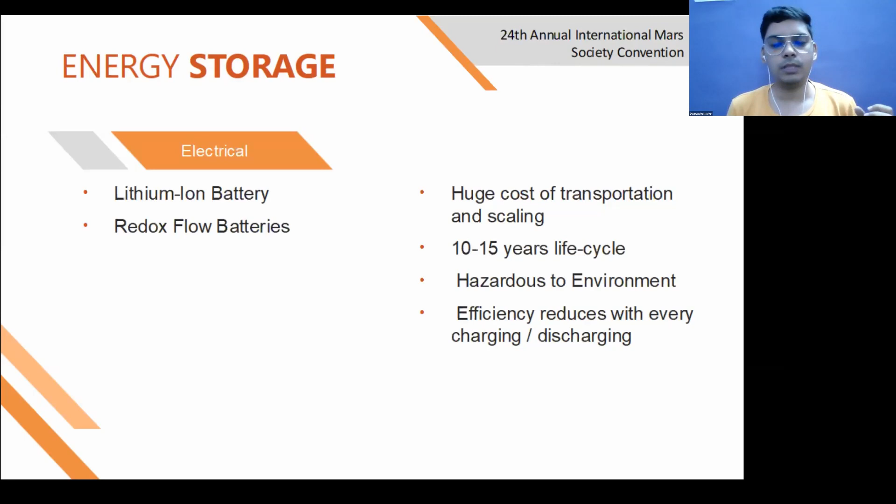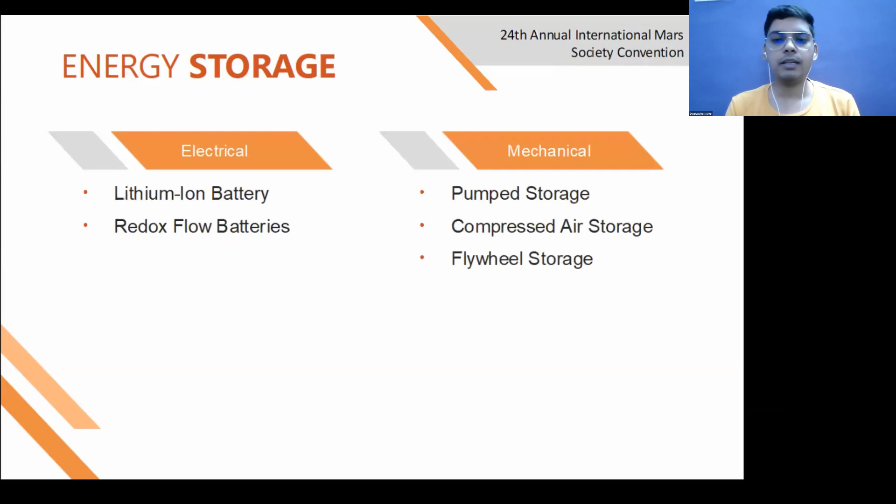So what could be the alternative? The alternative could be mechanical energy storage, which may include pumped storage hydro, compressed air storage, flywheel storage, and gravity storage. Coming to the first, pumped storage hydro has two reservoirs. This is commonly used on Earth, with an upper reservoir and a lower reservoir.

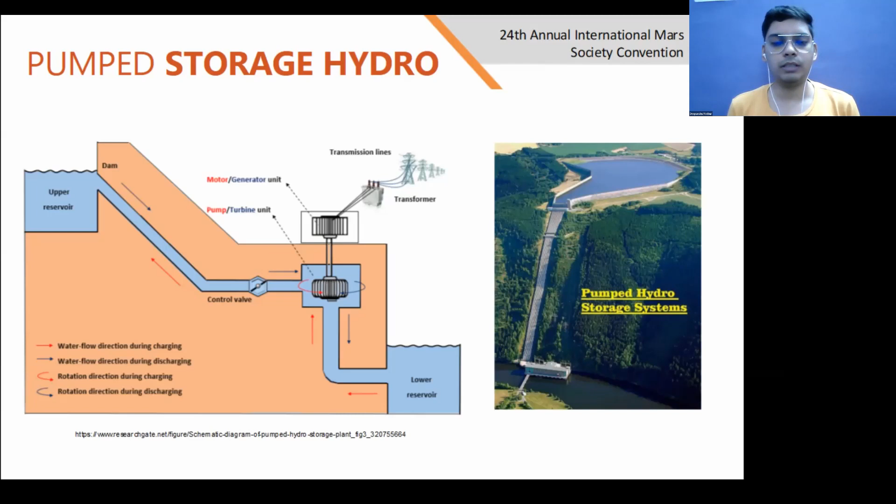When we need electricity, we release water from the upper reservoir, which has higher potential. This potential energy goes to the turbine, which generates electricity. When there is surplus energy, we pump the water from the lower reservoir to the higher reservoir. We cannot store electrical energy directly, but we can easily store water at higher potential. So we are using the gravitational potential energy of Earth to store water at higher elevation.

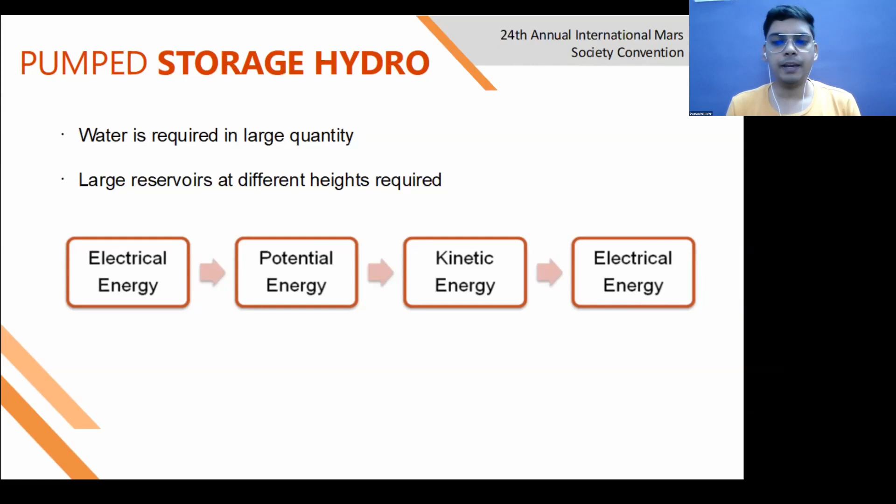Pumped hydro storage requires a large quantity of water and large reservoirs at different elevations. It converts electrical energy into potential energy when there is surplus energy, and then this potential energy can be converted back into electrical energy through the kinetic energy of the water.

There are a huge amount of Martian rocks which are available on Mars. So of course we cannot employ this pumped hydro system on Mars at least. So what could be the alternative? We can at least borrow this concept of storing the energy in the form of potential energy, gravitational potential energy, using these rocks.

So here comes our gravity energy storage or gravity batteries. Gravity batteries store gravitational potential energy by lifting a mass to a certain height using a pump, crane, or motor when there is surplus energy, and release this energy by lowering the mass when it is required.

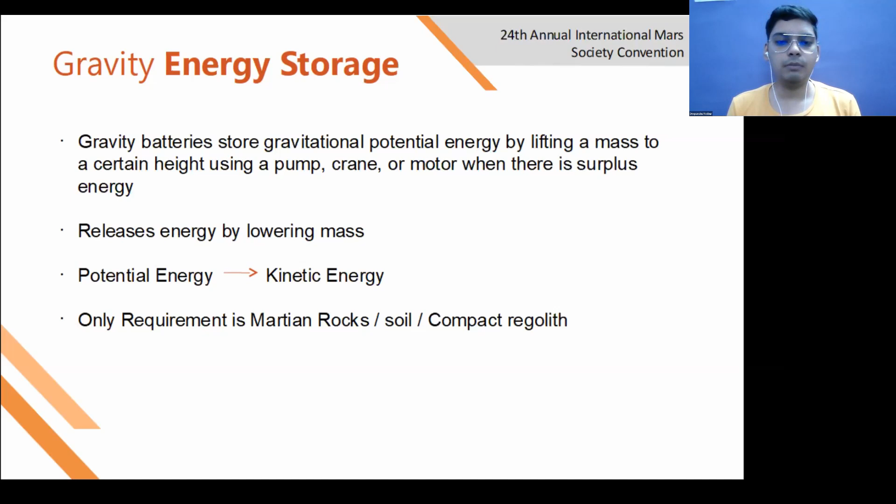So here again it is doing the same thing. We are storing the energy in the form of potential energy when it is in surplus, and when we need this energy, we will lower that mass, and through the kinetic energy of the rotation of the motor, we can again grab this in the form of electrical energy. And the only requirement is the Martian rocks or Martian soil or compact regoliths.

So here is a 2D depiction of this gravity battery or gravity storage system. Here we have a heavy mass which is suspended through cables, and this cable is tied over a drum or a flywheel, which is directly connected to the motor, a geared motor, through a shaft, and these geared motors are connected through a DC switch, and that DC switch will decide where to supply the energy.

So let us suppose we have surplus energy. These PV arrays are photovoltaic cells. When we have surplus energy, we will use it to drive the motor, and this motor will lift the heavy mass. In this way, we are storing the energy in the form of potential energy. But when we need this energy again, we will lower the mass in a controlled manner using the gearing mechanism, and we will again generate that electricity.

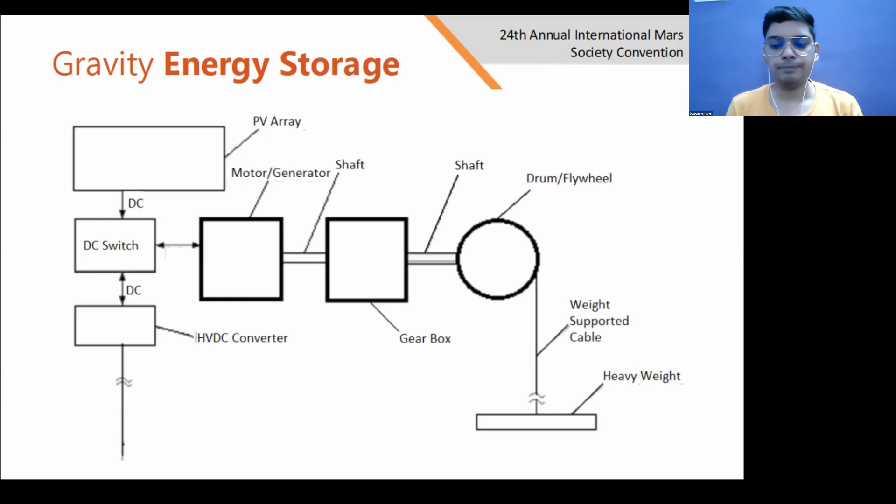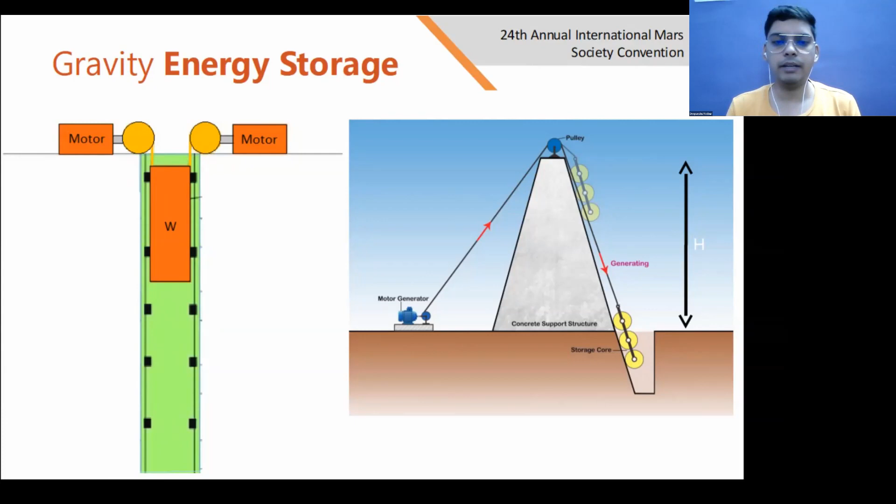So here we can see that there are two kinds of systems which we can use. We can elevate or lower the mass vertically, or we can also use an inclined surface, because ultimately the energy depends on the vertical height and the mass.

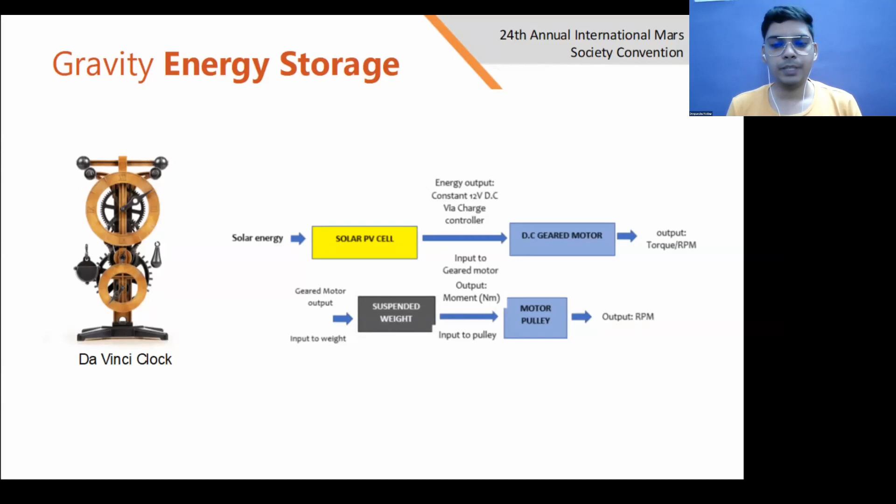So of course, a few of us might have seen this kind of system, which is called the Da Vinci clock. Here we have a heavy mass suspended on one side. When we need to run this clock, we just elevate this mass to a certain height, and this mass gradually lowers down with the influence of gravity, and without any electricity, this system runs the clock. So in this gravity energy storage, we are using solar energy through the photovoltaic cells, which transfer the energy to the DC geared motors, and then the DC geared motors simply lift the suspended weight.

So now coming to some of the mathematical modeling which we have here. Here I have some of the formulas we can use: the energy which we can generate or store in these kinds of systems, the height required to elevate or lower the mass, and the mass required. All these depend on how much energy we desire to store in the system, and the time required to charge these gravity batteries, because obviously time is also a crucial factor.

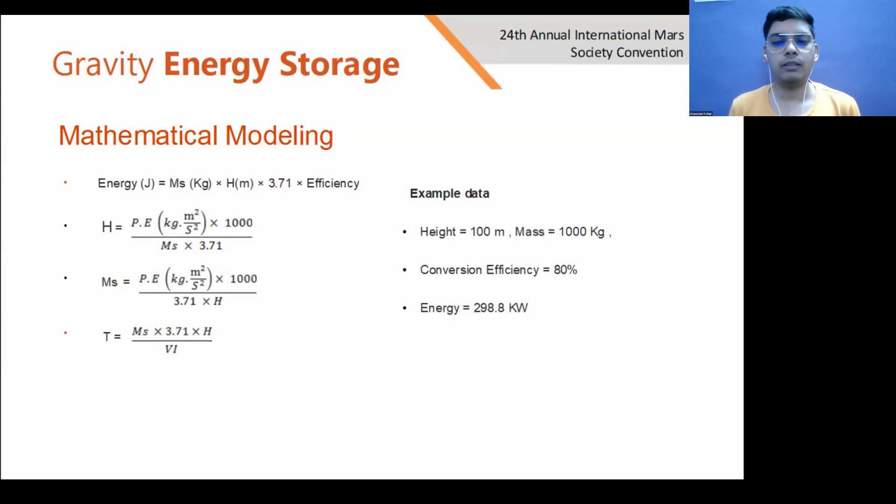Now if we consider the example data, if we take a 100-meter height for elevation and 1 metric ton of mass with a conversion efficiency of 80%, we can see that the energy which we can store or generate is around 300 kilowatts, which is pretty decent for this kind of system.

Also, if we take the average energy consumption per day, which is around 10,000 kilojoules for non-solar hours, that is, when solar energy is not available and for which we need to store the energy, and take 30 metric tons of mass, this mass will be sized around 2 by 2 by 2 meters using the Martian regoliths. And if we elevate it to 100 meters, we can easily generate more than 11,000 kilojoules of energy, which will certainly meet our demand very easily.

But even if we have a constant energy, we can still produce variable power output. Suppose we need higher power for a very short amount of time; then we can increase the drum RPM, the drum which is lowering and elevating the mass. So we can generate a high amount of power through this system for a very small amount of time. But if we need low power for a long duration of time, we can reduce the drum RPM to a certain level.

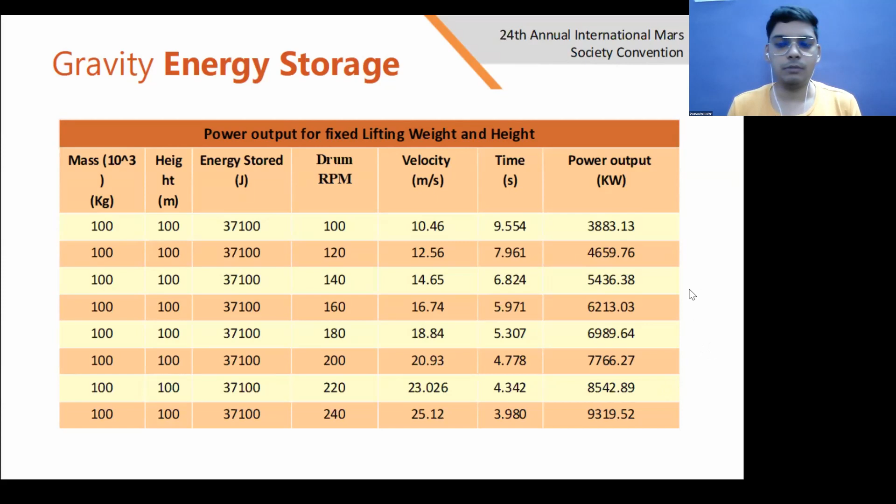And of course, with the help of smart systems or smart grids, we can optimize the system based on the requirements. We do this on Earth also with smart grids, optimizing the power output and the power requirement for the system. So we can optimize this also somewhere in between if we need.

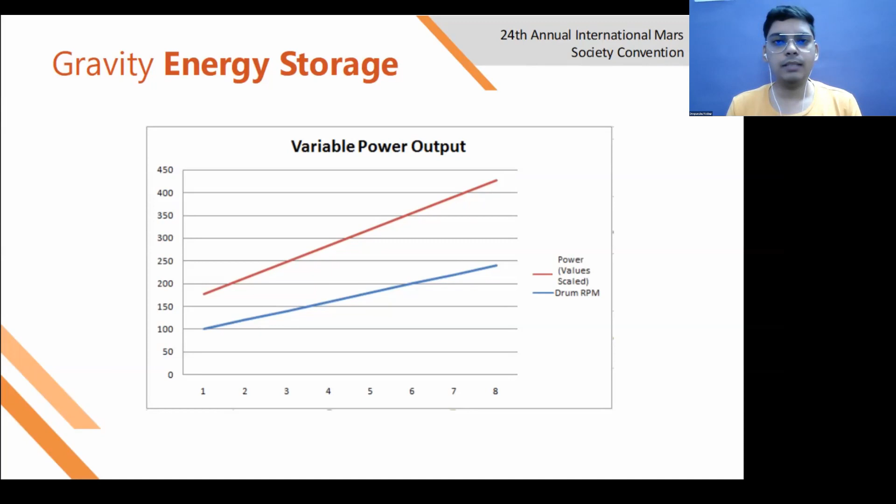So here is a graph which shows the power output versus the drum RPM. We can see that by increasing the drum RPM, we can increase the power output. There is a linear relation, and the power values are scaled. If we increase the drum RPM, we will increase the power output. Now the drum RPM can be easily controlled through geared motors, so it will not be any kind of issue.

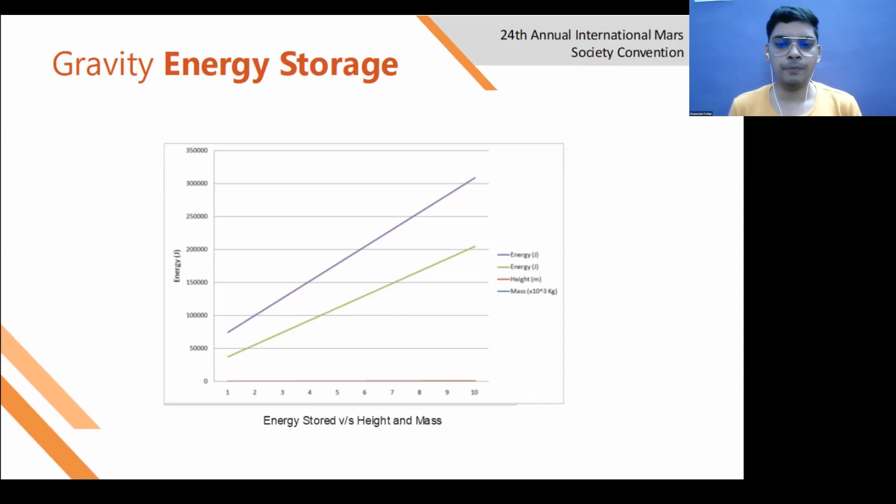And if we take another factor, mass and height, we can see that scaling is also very easy in this system. As we saw in the case of lithium-ion or other kinds of batteries, there was an issue of scaling, because we have to transport those things from Earth to Mars. But here scaling will not be an issue: if we increase the height or the mass, or even both, we will increase the power output or even the energy output. We can see this through this graph.

Now comes the question: it sounds nice that we can elevate the mass to a certain height and scale the system, but we do not have any kind of infrastructure on Mars, and we are saying that we have to do sustainable development on Mars. So it will be difficult to develop different kinds of systems for this battery technology. So I would like to put some light on the Martian topology here.

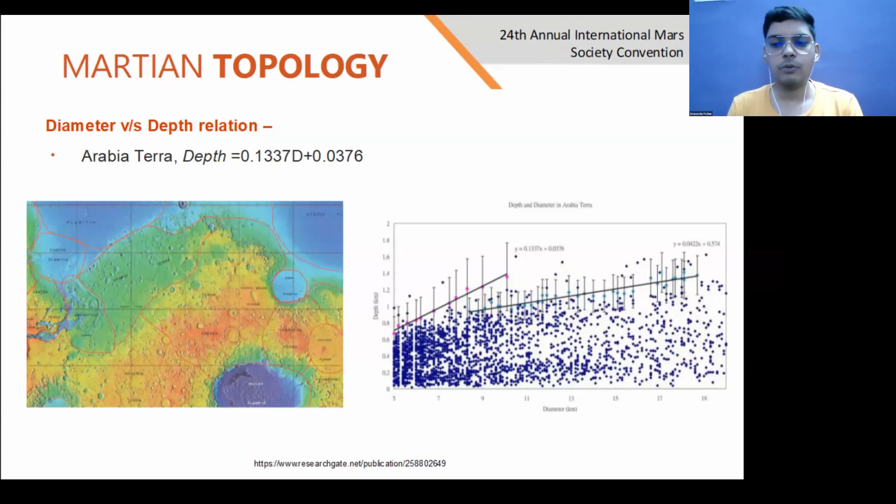So if we plot a depth versus diameter graph, we can easily see that there are hundreds and thousands of such craters on Mars. If we take craters from 5 kilometers to 20 kilometers in diameter, there are hundreds and thousands of such craters with depth of more than 100 meters, going up to 1 kilometer and even more for just 20 kilometers diameter, more than 1,000 on this kind of surface.

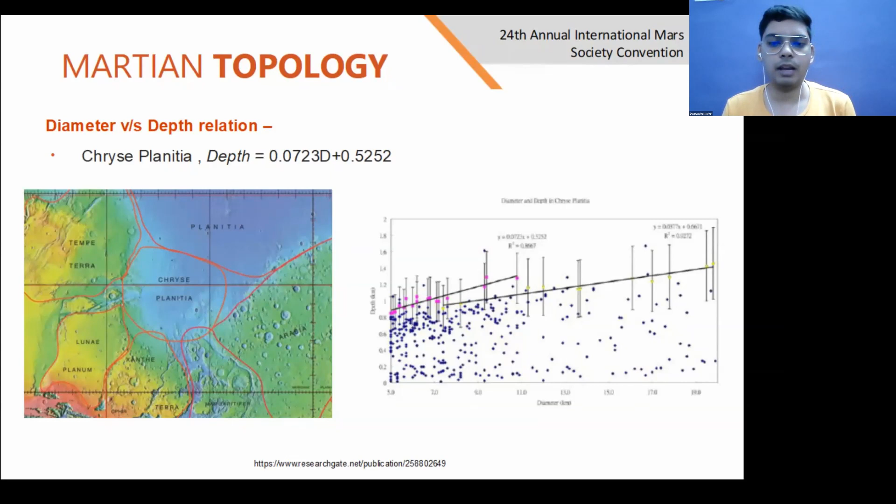And if we take another terrain, Chryse Planitia, we can see in the graph that there are hundreds of these craters with depth of more than or around 1 kilometer. And on this plain also, we can see this. So it is pretty clear that it will not be any kind of trouble for us. We can simply use these craters for elevating and lowering the mass.

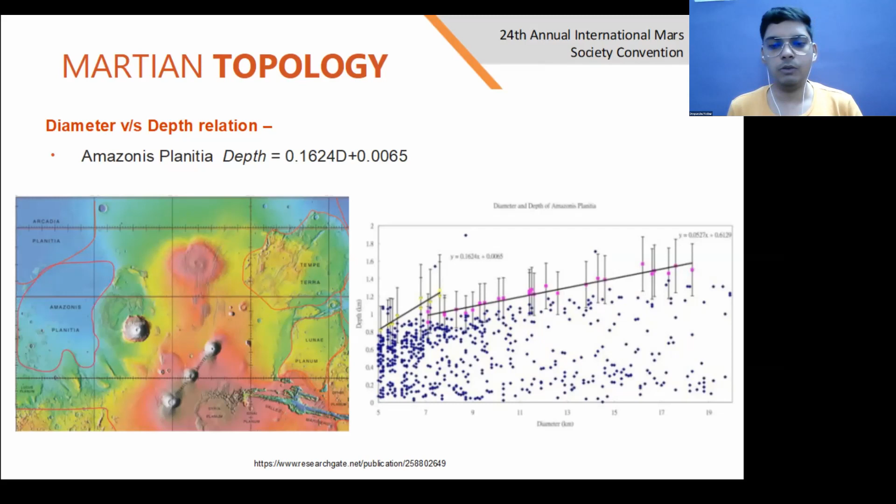And of course, our favorite Jezero crater, the place where the Mars rover Perseverance landed, has an average depth of more than 1 kilometer.

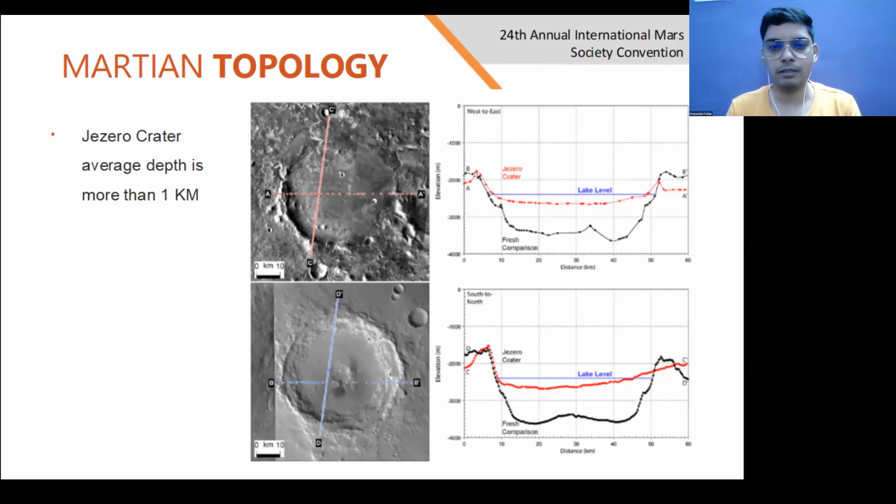So yes, it is pretty much clear that Martian topology is going to help us a lot in this system. So here I have a variety of designs. This design is taken from the Energy Vault.

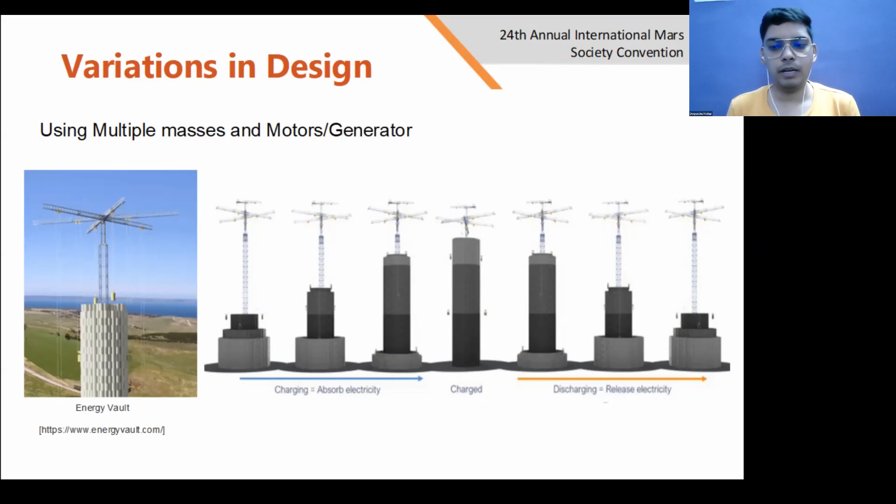So if we take small capsules of mass and we want to charge the system, we can simply elevate these small capsules, put them one over the other, and charge them. And here also we can take more than one motor to elevate the mass. If we want to discharge, we can do the reverse process: we will reduce the elevation of these small mass capsules, and we will discharge and release the electricity.

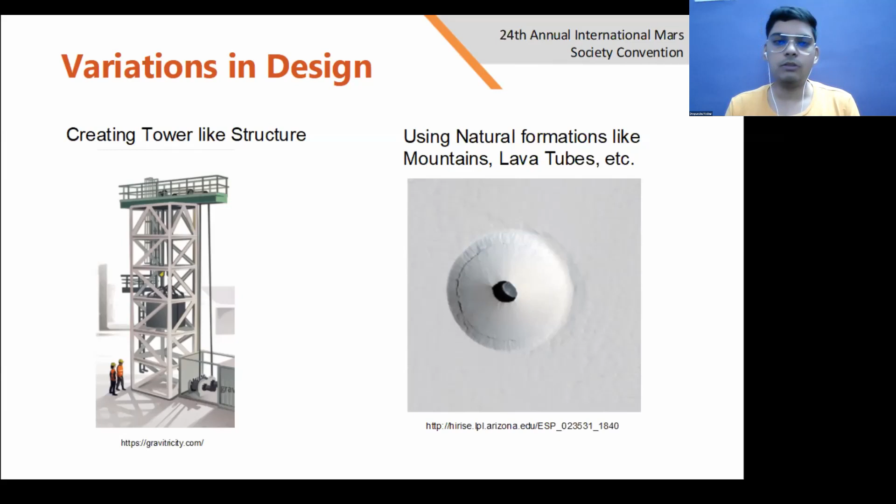We can also create a tower-like structure where we have a single heavy mass which we can lift and drop to generate the electricity, or we can use natural formations like mountains, lava tubes, and also the craters.

Coming to the advantages of this system, the advantages include profitability: gravity storage is economically superior to all other energy storage solutions. Why? Because it has low operational cost, which is even less than 1% of total capital expenditure per year, whereas this operational cost could be higher in the case of other kinds of batteries like electrical batteries.

And its applicability is good because gravity storage need not have the elevation differences like we saw in pumped storage hydro. We can use this system on a flat surface by creating an artificial tower to lift this mass. It can be easily integrated with the high voltage transmission grid, and can be implemented on mountain valleys, vertical lava tubes, inclined surfaces, etc.

Now coming to sustainability. Here we have minimal raw materials required, which is just the rocks, which are available in abundance on Mars. Hence there will be no or very low cost of transportation of materials.

For scaling, we can just take the mass from the rock, and if we can develop some good technology to extract the heavy metals from the surface of Mars, then it will be even better. Then we can generate more electricity because we will have high density material for this. It will have a small land footprint per kilowatt hour, because we are using the vertical height, not the horizontal surface, in most cases.